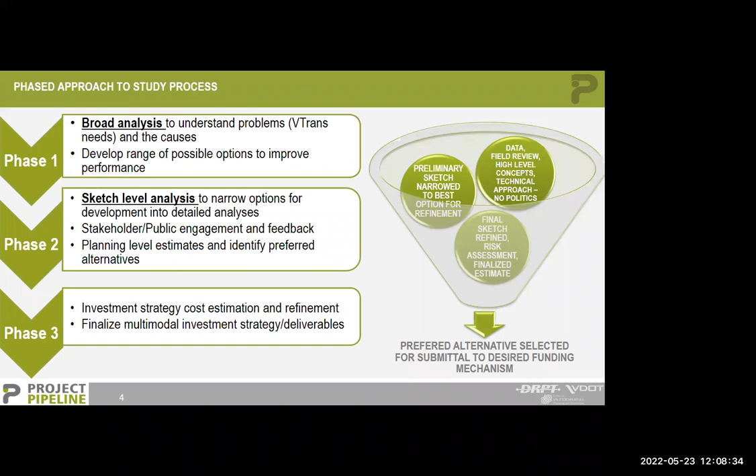We've been able to do 45 studies in right around a year using this phased approach, and about 75% of them have resulted in projects being submitted for this round of Smart Scale. So we feel this funnel approach, phase 1 through phase 3, really worked, and is something we plan on taking forward with several other study programs, but particularly with the Project Pipeline.

I'm going to go through this real quick. When we say performance-based planning - and many of you have probably seen this slide from me in the past - if your check engine light comes on, would you immediately say, I need a new engine, or I need to go buy a new car?

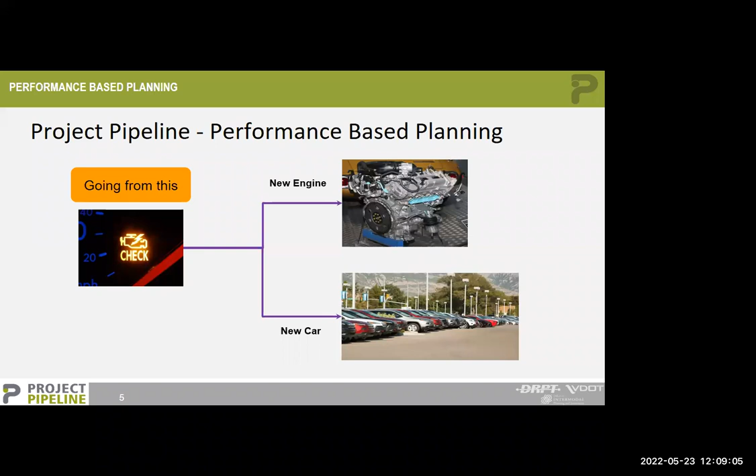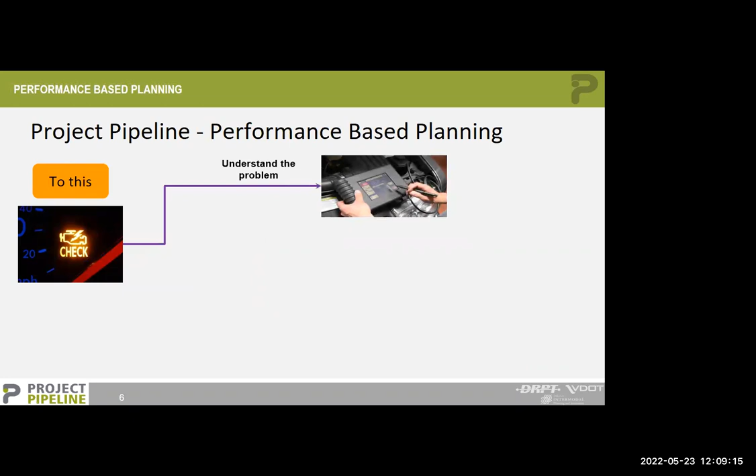Similarly, when there's a congestion need or a safety need, do we want our knee-jerk reaction to be, I need to widen the roadway, or I need to build a new roadway? So very similarly, what we're trying to do with performance-based planning is when an issue comes up, the first step should always be to understand what the problem is, what is causing the issue. Once you have a good understanding of that, you're able to develop and test a wide range of solutions.

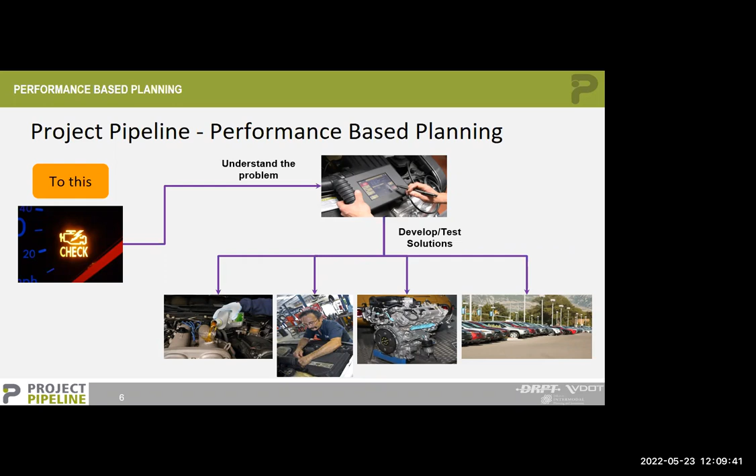Maybe a new car or a new engine is needed, but oftentimes you'll find there are other more targeted, more cost-effective things you can do. That really allows us to accomplish more, to solve more problems with the same amount of money using this performance-based planning approach.

So really what guides us: if it's not broke, don't fix it. So you've got to have a need. If you can prevent the breakage from occurring, preserving and protecting assets and preventing the degradation of performance over time should be your next priority. If it is broke, is there ways that you can fix what you have? And then lastly, if you've exhausted those first three options, then look to build something new or expand capacity. That's really the mantra we're trying to follow.

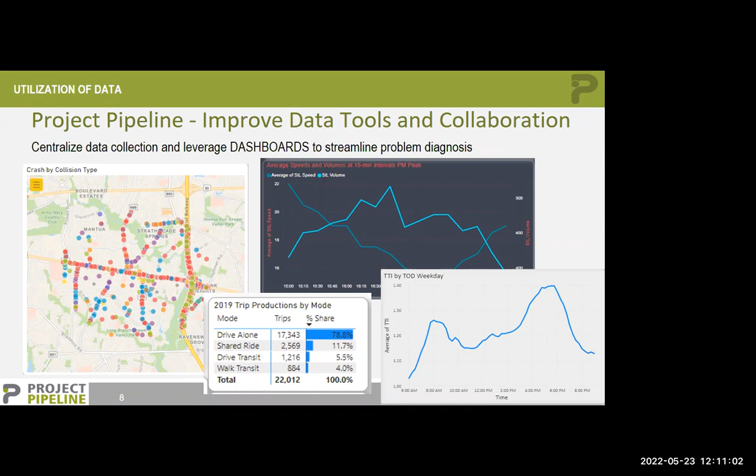Data is really key to allowing us to more quickly get up and running. So what we've done through the pipeline is establish a series of data dashboards that allow us to mine the overwhelming amount of data the state now has access to, whether it's safety, travel time, or speeds. There's a host of data sources we now have access to. The first step in Project Pipeline was standing up these dashboards that allow us to consistently analyze the information. These were web-based tools available to the study teams, so we're all looking at the same information, visualized in the same manner. Next slide — these are just some examples, some screenshot examples.

As I mentioned, we start with that VTrans need. We've got needs in different categories, whether it's bike access, capacity preservation, and we're going to be walking y'all through some examples here, both in the Bristol area as well as in Staunton.

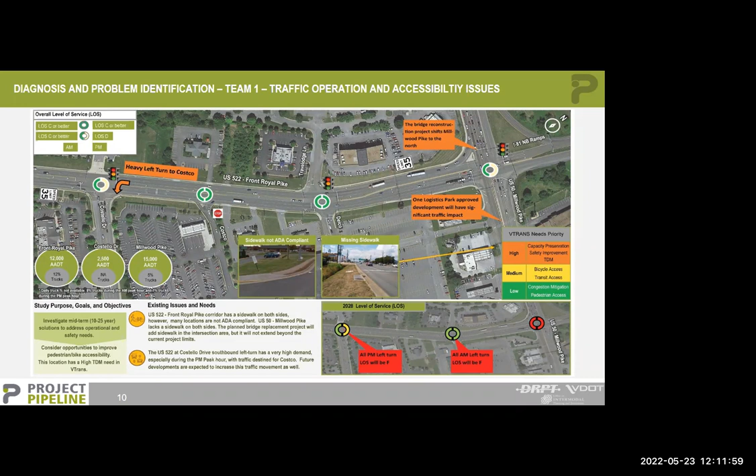Another key thing with the pipeline program before I turn it over is developing templates so that we're not reinventing the wheel. Each step in the process has a series of templates. What you're seeing here is the phase one deliverable, where we're framing the issues. We created templates that allow us to have consistent icons, symbology, and colors, so a study in Bristol versus a study in Nova have a similar look and feel, and we're spending less time designing the deliverables.

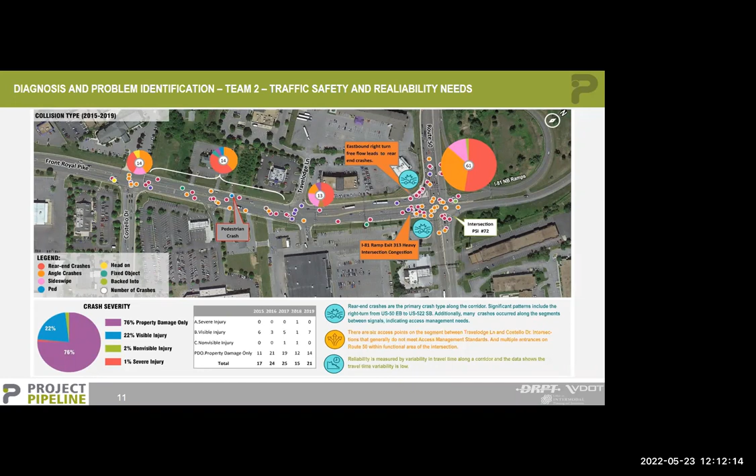Here's the deliverable for the traffic and safety group, looking at those issues and framing the problems at the intersections and along the corridors from a safety standpoint. And then reliability, transit, and TDM needs, taking stock of existing services and infrastructure. Next slide.

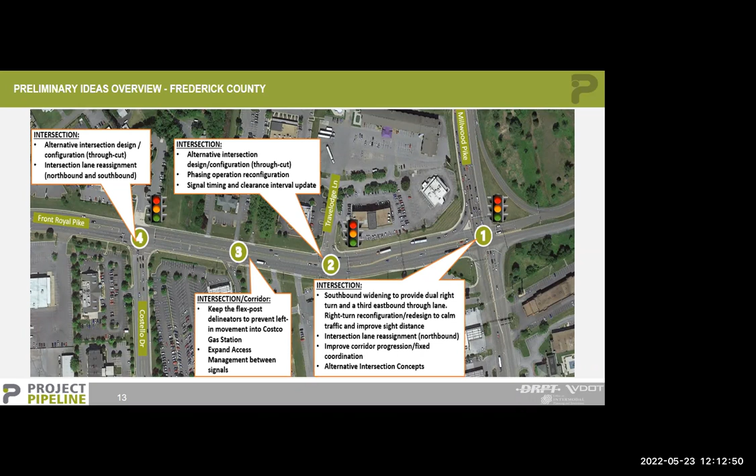Then getting into your brainstorming of potential solutions and fixes. This starts to get into phase two, where you're testing and developing alternatives. I feel like this template process has also allowed us to streamline the time it takes to develop these, as well as have some consistent look and feel on the other end. Next slide.

I've already gone over the phases. Where we're at in this initial inaugural run of the project pipeline is we are in phase three with 45 studies that we did across the Commonwealth. They were selected by the Commonwealth Transportation Board members for each district, based on the VTrans needs. We're essentially in phase three for most of those now, where we're finding cost estimates and sketches. This is a process that will go through every two years, and the hope is next round we'll be able to do more studies.

But with that, I believe that's my last slide. I'm going to turn it over to the next group to actually walk y'all through some examples that we've done throughout the state. So I'm going to turn it over to Nathan.

Yeah, thanks, Chad. Like Chad mentioned, really performance-based planning is our goal as part of the overall pipeline program. Chad gave the whole phased approach, but what we also identified in starting the program is that very often we have projects that maybe go through the Smart Scale process or have been studied previously, and either the costs are too high or there's something going on where we need that performance-based approach.

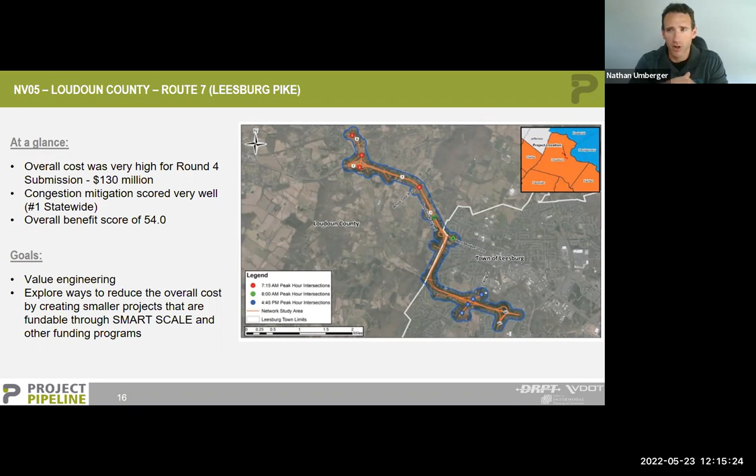So as we move ahead, you'll see that this corridor has some very high traffic, in that 60,000+ ADT range. So it's just getting beyond the capacity that we have here. So we have identified that big need, but where are we going with that?

So again, if you're familiar, just some key components. This is where the Dulles Greenway intersects. We have a large inflow of traffic that heads around the Leesburg area and over to Western Loudoun County. And so this really showed that need, and this project was very important.

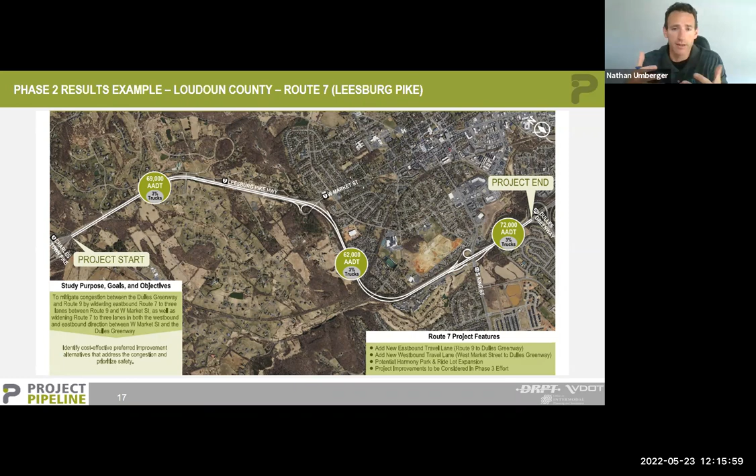So we didn't really need phase 1 in this case. We really were able to kind of start with phase 2 and employ that approach to really get started. So as following slides will show, we really dig in deep here. We go page by page of our concept plan to provide value engineering as well as that performance-based approach. So wherever we're making improvements, we're ensuring that they're providing the benefit from a smart scale scoring and meeting a need, and then seeing if there's alternatives that we can employ.

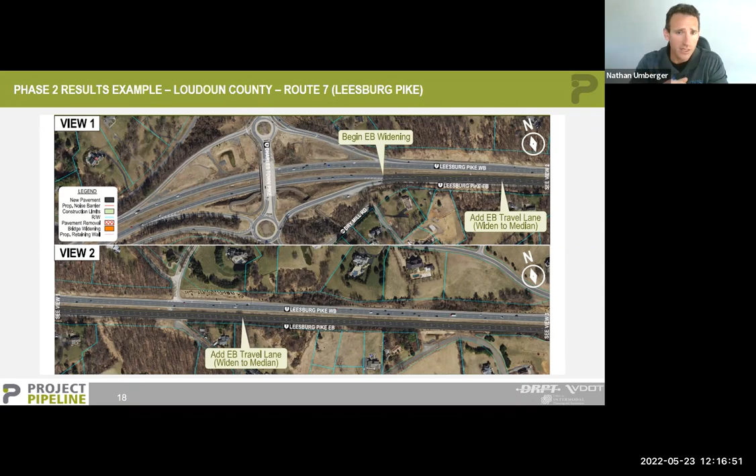So you can see we're starting here on the western side of the project. And one of the things we looked at right away was if we shifted the previous concept of just standard widening and we looked at widening to the median throughout most of the project, that was going to save us big impacts in the right-of-way field. I'll show you some dollar figures when we get towards the end of that. But that was something we were able to identify where, hey, if we're able to shift our approach a little bit, there's very likely to be some cost savings.

And so moving ahead here, you'll see we kind of carry this through. So you can see we're really looking at just location by location, improvement by improvement. What's driving the cost? Where are there risks? Where are there high ticket items that are being built into our estimate that we can provide this upfront planning preliminary engineering approach to come up with some ideas?

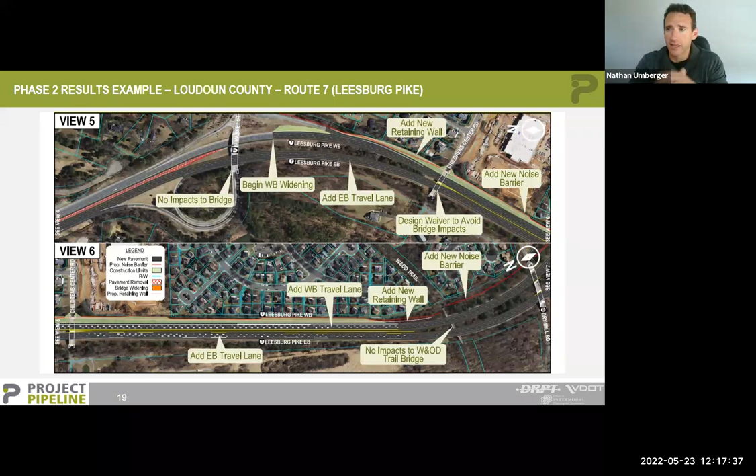And the last one that shows the project, you can see here, we even get down where we needed a little bit of survey. We're looking under the bridges. How do we avoid pier impacts? This just gives a specific example of where we're getting to, not the nitty gritty, but trying to dig down into the details to make sure we fully addressed everything we need, but nothing that we don't need for the project.

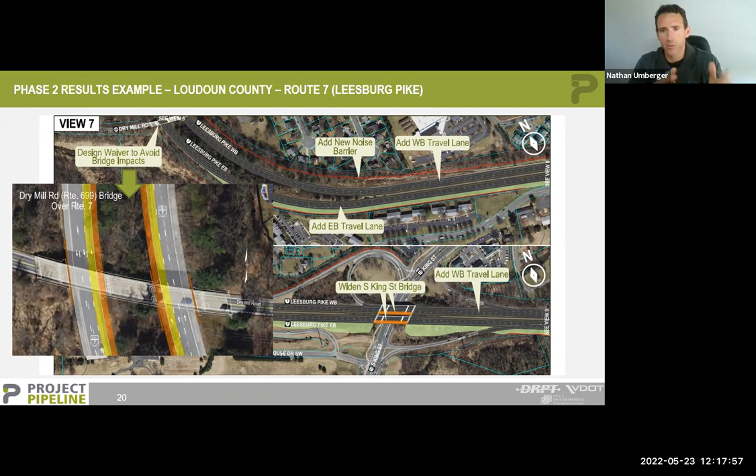And the last one here to wrap up will show where through this process and the performance-based planning approach that we used in pipeline, we're able to see about 12 to 20%, pretty significant savings for this type of project, where we're likely going to be able to lower the ask for the project even a few years later by $20 to $30 million. So being able to come to that 12-20% savings is going to be a real big benefit in how well it could compete for funding going forward.

And so I won't go line by line, but just kind of highlighting from our previous slides where we eliminated bridge impacts, reduced right-of-way impacts, looked at different ways of widening, improved our typical section where we needed to identify waivers and exceptions that might help us out and reduce our estimates by a few million dollars. We're working with the district to make sure they're in agreement and that's a good idea and makes sense, so that going into round 5 of Smart Scale, we've got a really solid baseline of what's going to solve the problem, as well as a good overall concept that's going to compete well.

So that's just a good example of performance-based planning, where we've taken previous projects, and I'll turn it over to Blake and Rob to talk about some of theirs.

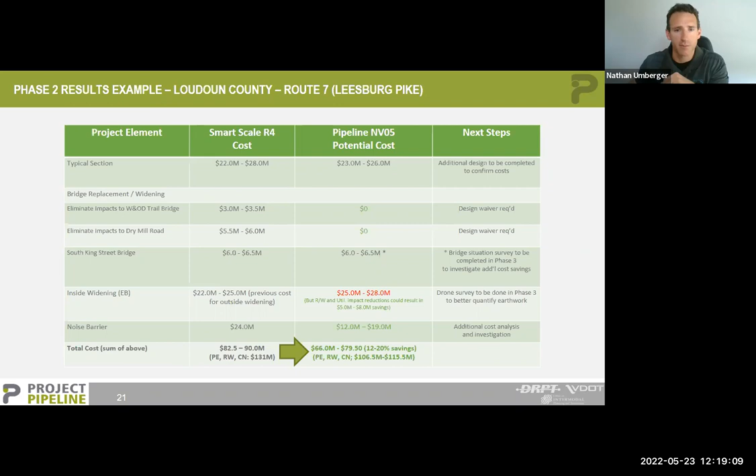Thank you, Nathan. For those of you that may not know who I am, my name is Blake Ayler. I'm with the Virginia Department of Transportation, and I'm the Bristol District Planning Manager. I'll also have with me Mr. Rob Prunty with Kimley Horn, and we have been partners in crime on this project.

It's been a fun one to go through. We are now, as Chad has mentioned, starting to work our way into phase 3 of this project. So we will jump into this example within the Bristol District. As you see on your screen, we're looking at an area along Interstate 81 that is just off of exit 19, which is just outside of the Abingdon town limits. For a lot of people, you may know where that area is located. This is a heavily traveled corridor.

Our ADT is around 27,000 vehicles, so that is a high number along this stretch. We have a lot of generators within this region, being the Walmart Supercenter, Lowe's, Dunkin' Donuts, a medical facility, and a number of other items here that attract over 9,000 commuters daily to this location.

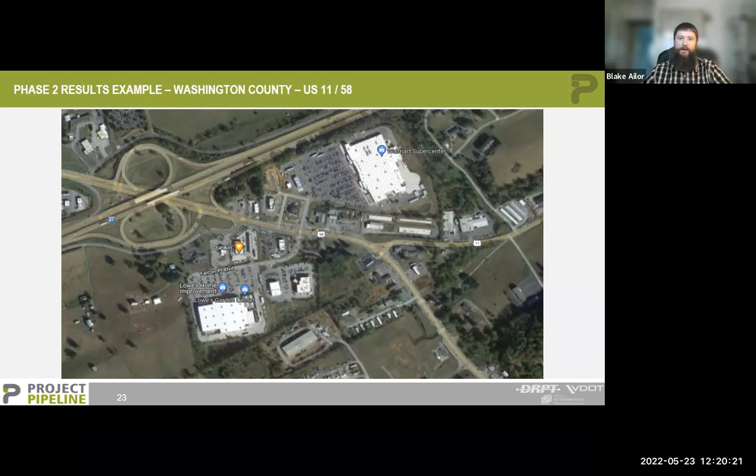Knowing that, digging into some of the data that Chad talked about as we begin to dig into these projects and really take a look at it, we start to pull in some of what makes this corridor have issues with its transportation network, and how can we solve those problems. As Chad mentioned, as we start to look into the VTrans priority, everything within the Commonwealth starts with our transportation plan. So we will always look to VTrans to guide us to the areas that we have issues.

Within this region, we'll see that it is severe for priority 1, very high for bicycle, congestion, capacity preservation, and safety. Within our district specific, this region ranked number 1 within a multitude of categories, and one that we are very familiar with. Similar to the example that Nathan gave, this location has been submitted in previous rounds of Smart Scale at the intersection of US 11 and US 58, which I know Rob will dive into a little bit deeper. But it had not been successful.

We knew a performance-based planning initiative needed to occur here in order for us to really dive into those specific issues that are occurring. So down at the bottom of the screen, you'll see that this is a heat map for our hot spots for crashes. Total crashes along this corridor in the 5-year span that we looked at between 2015 and 2019 is 138. There are a high number of rear end and angle crashes along this corridor.

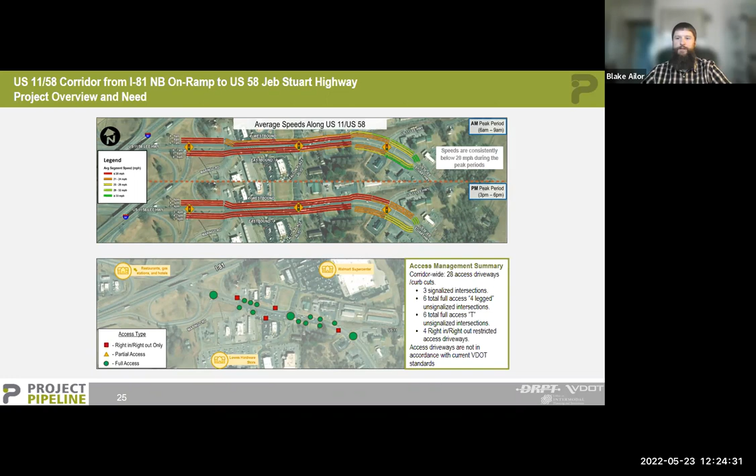I'm going to turn it over to Mr. Prunty with Kimley-Horn for him to dive a little bit deeper into the project. Thanks, Blake. Appreciate it. So as you mentioned, I'm Rob Prunty and worked with Blake, Chad, Nathan, and others over the past 9 months on this project.

One of the things we looked at was how to group some of the potential solutions that fall into the line of the model that Chad went over earlier, especially to look at opportunities for innovation. So we looked at some access management alternatives to address some of those issues you heard Blake mention, in the area shown in the bubble there with alternative 1 over on the western side of the corridor.

On the eastern side of the corridor, where it says alternative 2A and 2B, we looked to see if there were things we could do, noting that feedback we got from the public indicated well in excess of 55% of the public was concerned about both traffic operations and safety, and looking for those kind of improvements in the area. So the intersection there at Route 11 and 58, we looked at some different options for how we might be able to allow for safer and more effective operating conditions in that area.

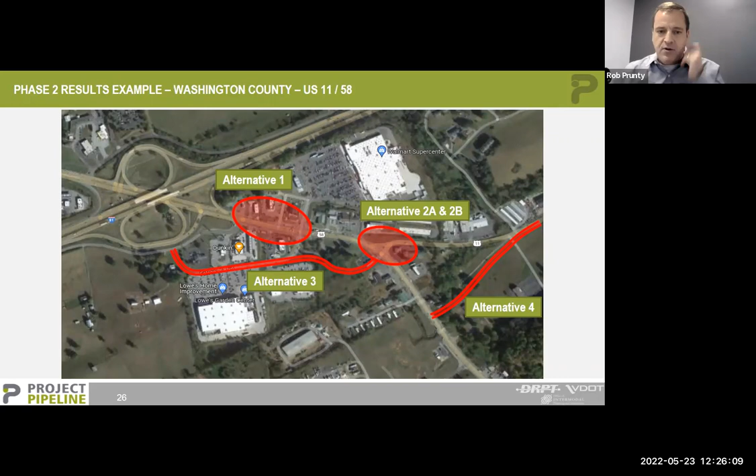And then the two areas you see, alternative 3 and 4, took a different approach of looking at some potential relocations to help spread out the number of junctions and the amount of traffic involved in these larger angle movement interactions along the 58 corridor. So a couple of different options there, corridor wise.

So on the next slide, these are the different things we looked at - some potential for limiting movements, especially angle movements, to address some of those angle crashes Blake was mentioning, under alternative 1, with some access management near Maringo Road. The two alternatives that came to the top based on our preliminary assessments were looking at some modification of the intersection to provide modification of the channelized right turn that's out there today, which can sometimes cause both safety and unexpected driver expectation issues, as well as looking at a potential roundabout.

And in some areas of the Commonwealth, folks are not used to roundabouts. One of the things we look at each time we consider treatments that might help solve some of the issues out there is whether there's an unsignalized option with an innovative intersection that could work. And the department actually has a policy to always consider whether a roundabout is something that would be feasible.

A couple of the other alternatives I was mentioning are the two potential corridor improvements where we would look at some sort of realignment or combining of roadways. So what I'd like to do is just do a quick walkthrough of each one to show you how we looked at this and then what were some of the pros and cons of each.

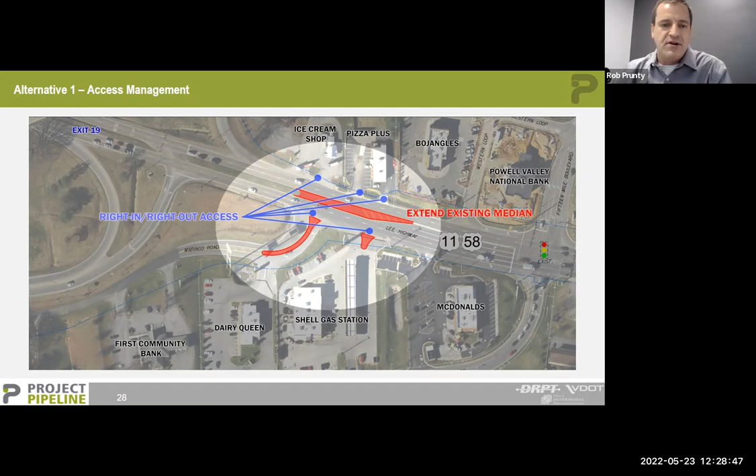In looking at the area a little bit further to the right there on our previous diagram, we got this option to remove the channelized right turn.

One of the things we did here on occasion is look at folks coming from Route 11, on the right-hand side of your screen, whipping around to get onto the US 58 corridor. They come very quickly around the corner, and you've got people navigating in and out of driveways just further to the west, for instance at the Highlands Animal Hospital and locations beyond. Folks would quickly turn onto the 58 corridor and then shotgun across to make a left further down. If those movements were channelized and brought to the traffic signal instead, it would allow for a safer maneuver and let people get in and out of those driveways further to the left of your screen in a more orderly and safe manner.

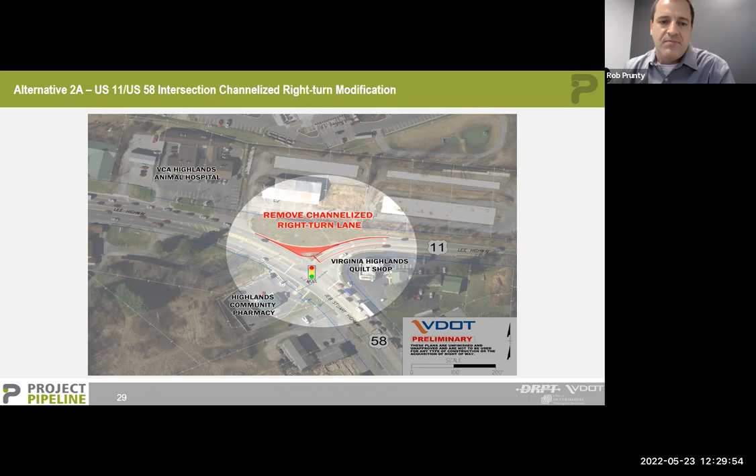Looking further, as I mentioned, that innovation option, a roundabout, was considered. What you'll note here is it requires quite a bit of right-of-way take with some adjacent parcels, and a stormwater detention area would result in some notable impacts to the adjacent land use that's out there today. But we did want to take a look at it to see what would be the benefits from a safety and operations perspective.

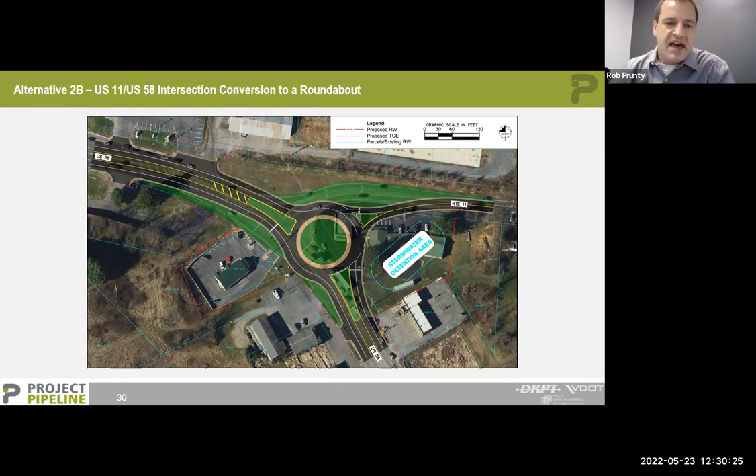Taking a look at the first couple of alternatives and their pros and cons, we found some minor improvements in delays on the minor streets intersecting along 58 and 11. We did reduce the number of conflict points, but because of those right turns, we would introduce additional U-turns further down for people needing to turn right, go down, and then make a U-turn to head back in their original direction due to the right-in, right-out restrictions. So we saw some increases in delays on the main corridor at the signal at US 11, which was something people were concerned about.

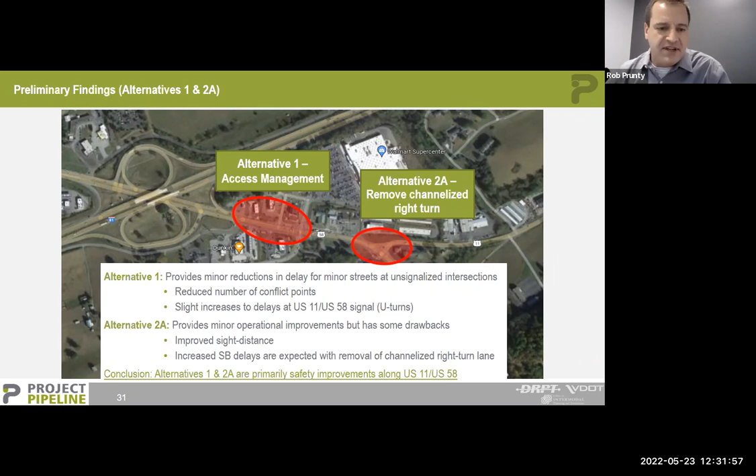The alternative 2A with that channelized right turn showed some improvements, but also some drawbacks in terms of demand at the signal itself for stopped movements and competition for green time. We did see improvements in sight distance, which would help on the safety side, but anytime you bring a channelized turn back to an intersection, you'll see the potential for additional delays. Our conclusion was that these improvements, while addressing safety, did not address all the issues of capacity preservation and safety highlighted by Blake in the beginning.

So we took a look at a couple of other options. Like I said, that roundabout was something we examined in terms of the delays related to upstream intersections, because you always have the danger of queuing spilling back from one intersection to the other. You don't want to lock up the roundabout, and at the same time you don't want to jam up the upstream signal because of people waiting to get into the roundabout with an appropriate gap. We found that it performed with some reduced delays, and there were moderate queues in the area.

One of the things we were most concerned about was the queuing going back to that upstream signal a little further to the left at Falcon Place, which would have a negative impact on both. So the biggest concern we had out of this option was just the amount of land impacted in the right-of-way and the relocations that would be required.

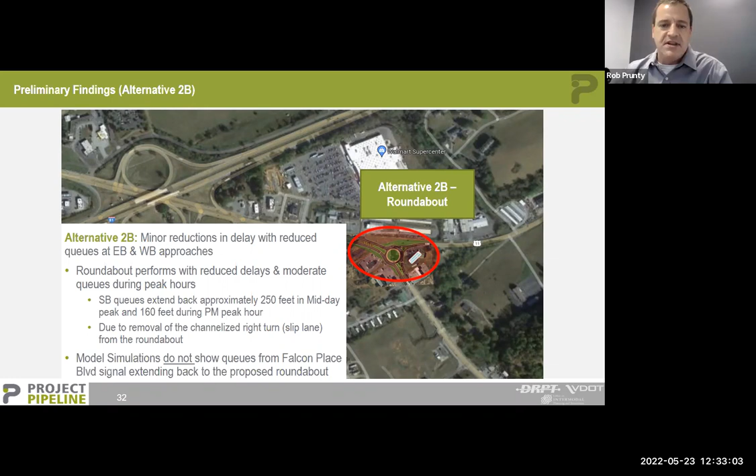Taking a look at some of the other options, option 3 that we looked at was kind of an unusual approach: relocating Falcon Place, which you see in the middle of your screen next to the McDonald's where it intersects today, further closer to the area where the signal is with Route 11, and having a more conventional 4-way signal there. That might help break up some of the demand for turning movements in an area where we've got a lot of access management issues.

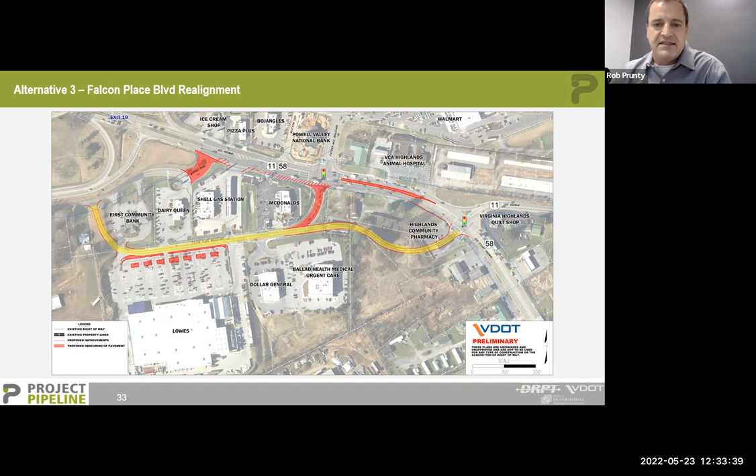So looking at some of the issues we saw as we analyzed this—if you can go to the next slide for me, thank you—by taking those volumes away and diverting them, it certainly helps improve some of the issues we were seeing with competition for gaps and availability for turning in and out of places like the gas station, the McDonald's, and the bank.

By moving the roadway so that it's more aligned with Route 11 on the right-hand side of your screen, it allowed us to eliminate a northbound phase of the road adjacent to McDonald's. So going from a 4-leg to a 3-leg at that particular intersection was helpful in reducing delays.

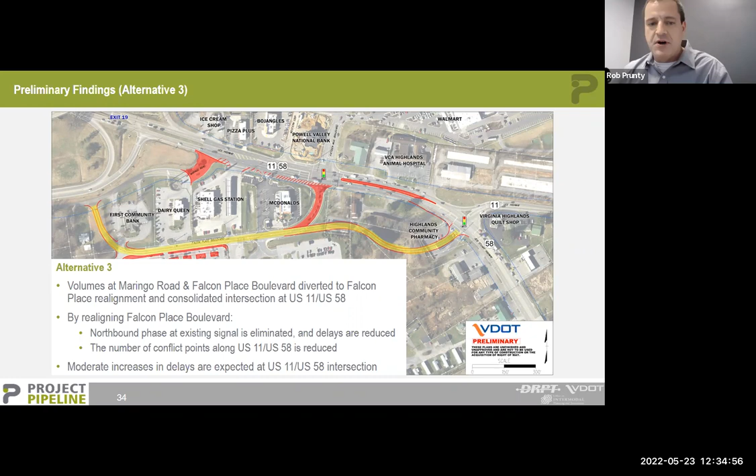But we really didn't see much improvement overall, as there were moderate increases in delays that we might see at the 11/58 intersection, because we were funneling more traffic through on the left-hand side as 58 curves back around.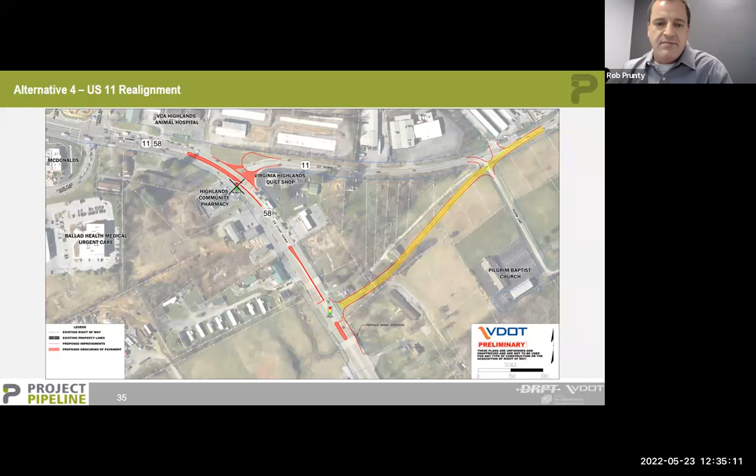Taking a look at the other realignment option, this would involve taking Lee Highway, Route 11, and pulling it in so that it intersected more at a right angle, getting a little better spacing in that area, and we were able to get rid of having a signal there. We would cul-de-sac the existing intersection and still provide access to those businesses, but the main way to get between Route 11 and 58 would be relocated, providing more spacing between signalized intersections and helping with progression along the corridor.

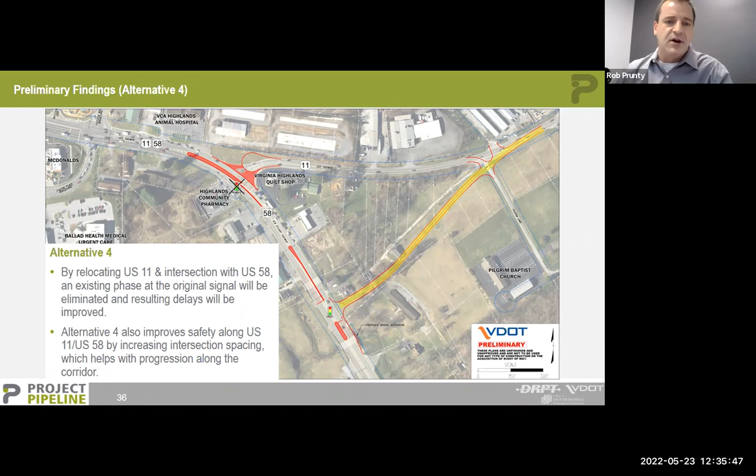So in taking a look, you can go to the next slide, please.

In putting it all together, we took this out to the public through an online survey with our partner MetroQuest that showed all these different options, and asked the public to weigh in. We also coordinated with a lot of local agencies.

Here's one of the big benefits of this Project Pipeline program. Through talking with folks on the ground who live and breathe both the land use and future potential economic growth in the area, we found that some of the roadway relocation we were looking at for that Falcon Place Boulevard realignment...

where it would go to where the signal is that's got the X through it, really caused issues with both future land use proposed in that area, as well as potential concerns for the Lowe's in the south bottom left corner of your screen, and the businesses out there today. That was really a concern to consider.

Sometimes the partnership with the local departments, with local officials, and with the locality in general can inform your decision making, to make sure you've got the best mix of land use planning, transportation, and the interaction between them. So we ended up looking at a combination of a couple different things, scaled down to one preferred alternative we're carrying forward.

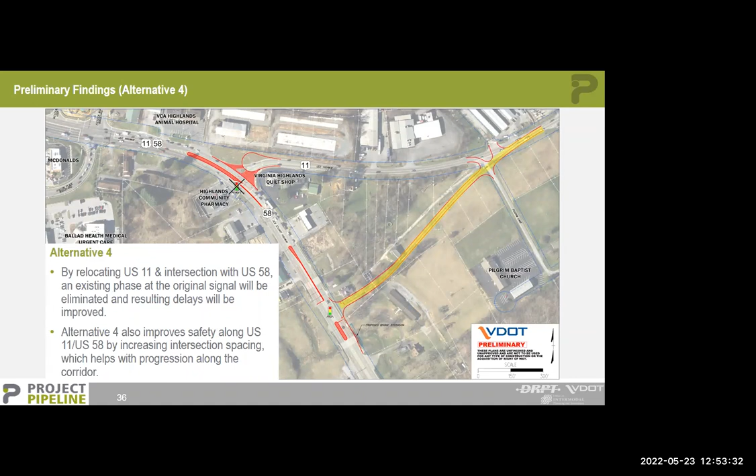It's definitely looking at it multimodally. I'd add, Blake, if you could go back to that screen showing VTrans needs, around slide 10, 11 or 12. That's one thing that allows us to get a quicker start - a lot of analytics go into the VTrans need process. There's public engagement, engaging with the localities and the PDCs, and this really drives us moving forward. You can see in this specific example, bicycle access - anywhere it's low or above means it's something we're going to look at. If it's got a none, that means it was not identified as a priority, and typically we're not going to look at it unless we get information during the engagement phase that's not reflected in the data.

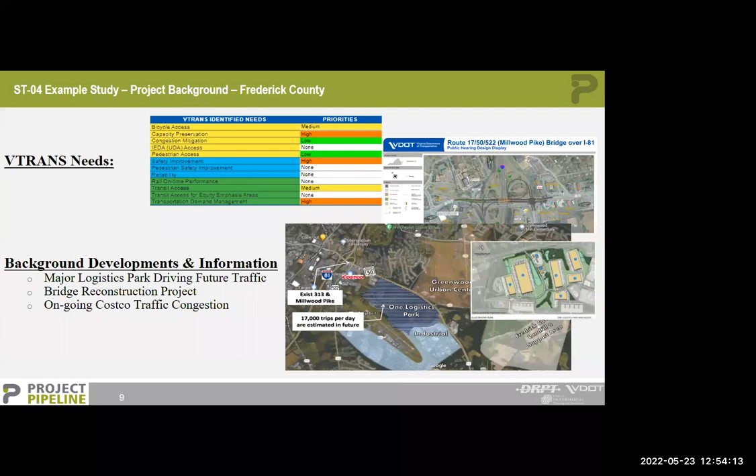So all of these studies, if you look at them - and I encourage y'all to go to the VA Project Pipeline website - you'll see a heavy focus on making sure we're not just looking at highways, but looking across the board at travel demand management, transit, bike-ped improvements, and safety for all users across all modes.

Chad, I'll add to that. We had three teams at VDOT as part of this process: safety was team 1, congestion was team 2, and team 3 was made up of the Department of Rail and Public Transit. So DRPT had their own team within each of the studies within the district. Rail, transit, TDM needs, and things of that nature were looked at in detail by the DRPT team to determine what types of recommendations needed to be put forward.

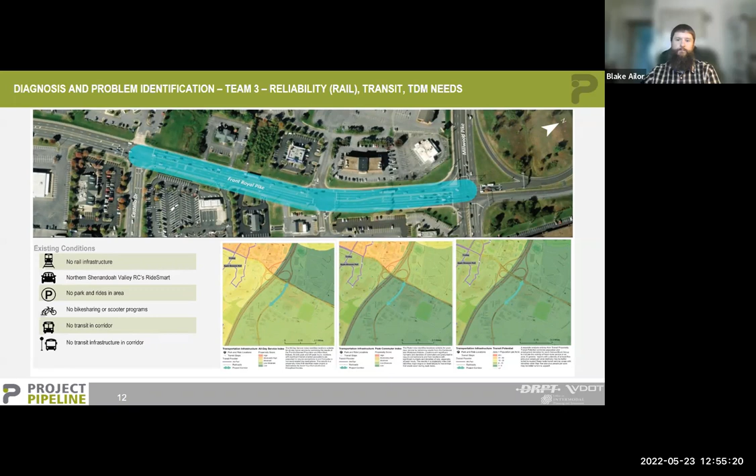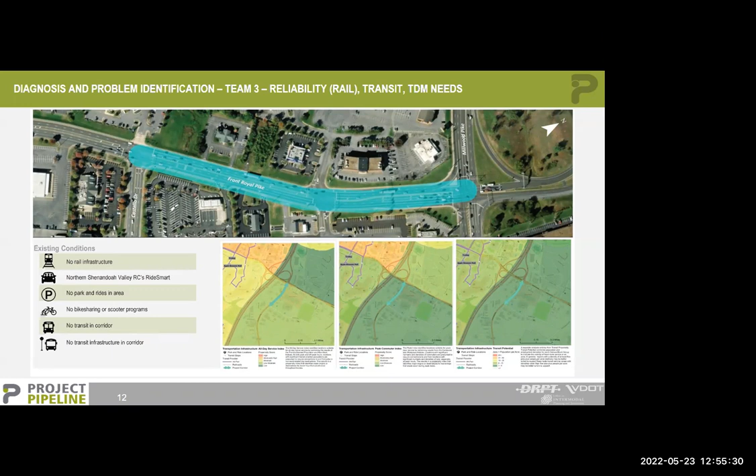Submitted by an anonymous attendee: can you describe how the projects are selected for pipeline studies? I'm not sure to the extent at which this was touched on within the presentation already, but perhaps if there was anything else additional to add.

So Chad, I can give an example in Bristol. As we prioritize it, the central office, part of Chad's group within the Office of Intermodal Planning and Investment, we have a VTrans team that went through all of the state's needs listed within our state's transportation plan, and they prioritized those needs based on severity. On the top part of this graphic, you see priority 1, 2, and 3. If they were ranked as priority 1, so Bristol District, for example, we took all priority 1 locations inside of our district. We dove into the metadata to see what was causing it to be a priority 1, and calculated the scores, ranking priority 1 locations from worst to least.

We then went through and removed old study locations, old funded project locations, things of that nature. We went back to what was left over and took our top 5. At that point, this was the number 1 location we're showing here within the Bristol district via those scores. So very much a data-based system, and I'm pretty confident each district took a very similar process. In the end, it had to be approved by each district CTB member and signed off on. There could have been other projects that came in and out as long as they contained a priority 1 segment or location.

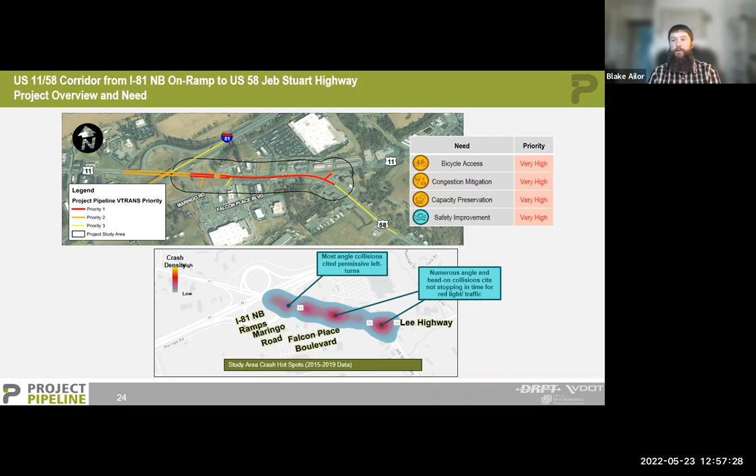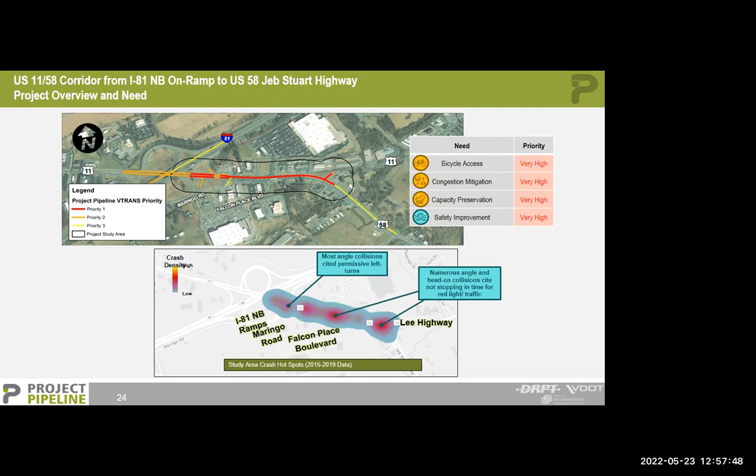Yeah, and that's very consistent from my experience with the other districts. The districts working with DRPT made initial recommendations, here's things that we think make sense, and then the board members reviewed that and made a decision on, all right, these are the 5 studies that'll move forward. But most of the districts did get input from the affected localities, after the priorities were identified, to make sure there was local and regional support to move forward with some of those studies.

Okay, and I think we have time for one more question. An anonymous attendee asks, how do we get an account for Pathways for Planning? The website does not appear to allow one to create an account.

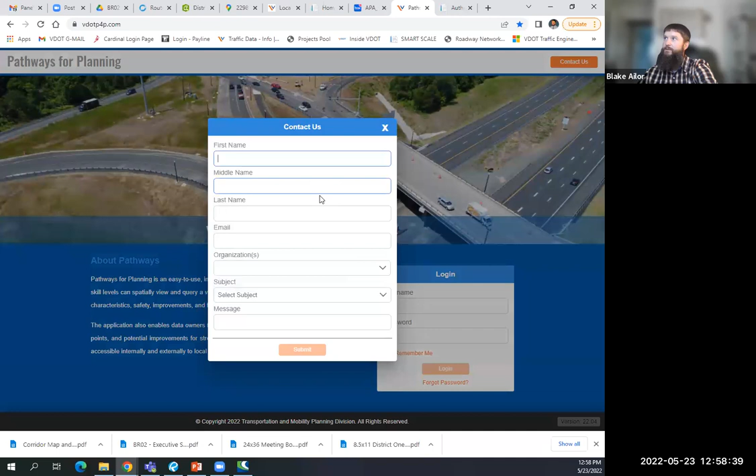Sure. So on Pathways for Planning, real quick, if you'll go over here, you can create by clicking contact us and sending this in, and I believe you will do the request access here. You will fill this out and submit it, and they will email you back. Then at that point, you'll be able to come back to this website, fill this in, and log in for the first time.

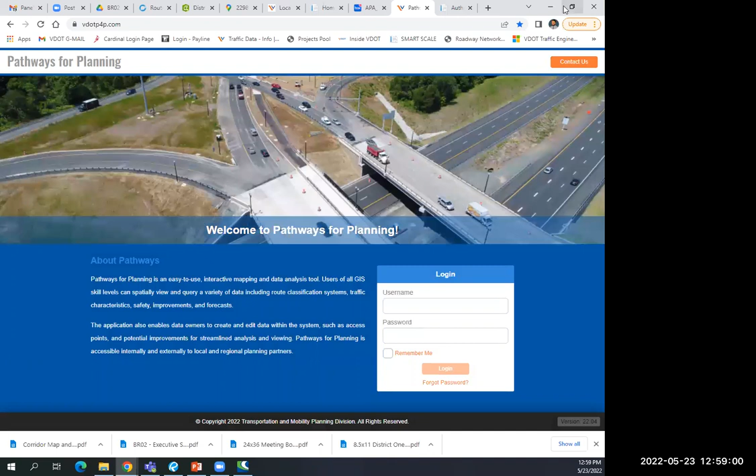Perfect. Since that was so quick, I think we do have time for the very last remaining question. Another one from Hannah Twiddell: what's the relationship between pipeline studies and GAP studies, Growth Accessibility Planning Program?

That's a good question. I think the pipeline studies are more project solution oriented, getting something ready to compete for funding, say at the local, regional, or state level. The GAP studies are really meant, and I'm speaking based on my very limited understanding, but I believe the GAP program is really providing more assistance at the local comprehensive plan level, being able to stand things up and have a local planning process that better integrates transportation and land use. That's my understanding, but I would have to defer to Jatinder and his team to give more background on the GAP program, because I have very limited background knowledge. Blake, you may have a little bit more knowledge of that program than I do.

Yeah, I think you hit it, Chad. Unfortunately, within our district, we haven't had anyone try to receive those funds yet or apply for that funding. We've certainly advertised it, but we haven't had anyone go after it yet. But I believe you hit it right on. If you go to the Office of Intermodal Planning and Investment website, you will find a section for the GAP funds, and it will dive into and talk about what those funds are, what they can be leveraged for, and how they can be used.